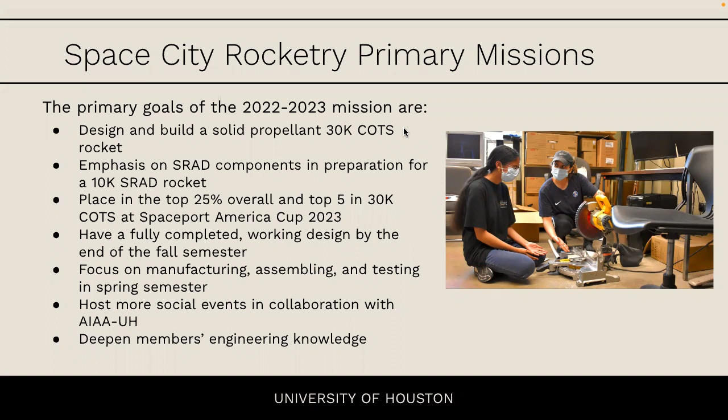Some of our secondary missions include beginning research and development into SRAD solid rocket motors, encouraging members once again to obtain their L1 flight certifications, continuing the research and development of composite tubing using the X-Winder with our structures subteam, and mainly with our analysis subteam, continuing the practical use and learning of various engineering simulation software such as CAD, FEA, CFD, and also getting our feet wet with some custom flight simulations.

Joe will now cover our team structure for the upcoming year. Thank you. So, as you can see in front of you...

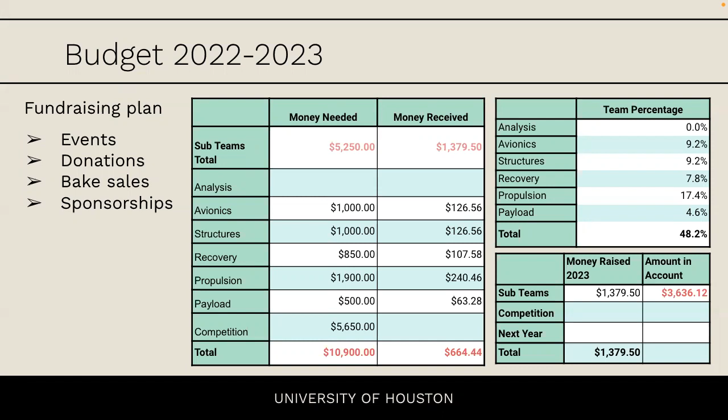Okay, up next we have the sub-team projects. We will start off with the analysis sub-team lead, Omar.

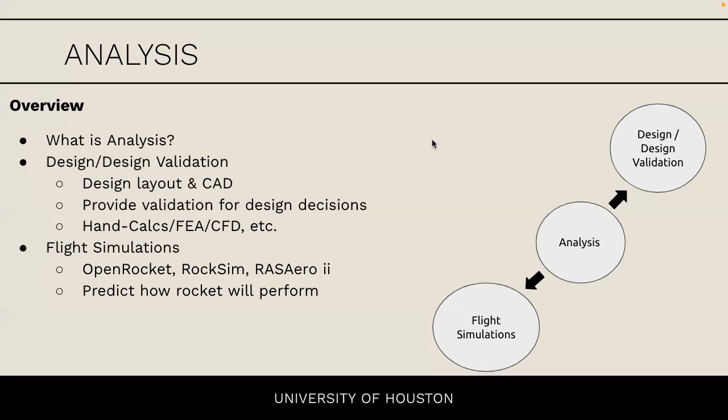A little overview of the scoring of Spaceport America and why we place such an emphasis on this. Out of the 1,000 points total possible, 500 come from flight performance. Out of these 500, 350 come from how close we get to our target apogee, which in our case is 30,000 feet, with a plus-minus of 30%. So if we stay within the 21,000 to 39,000 range we get points, but obviously the closer we get to 30,000, the more we get.

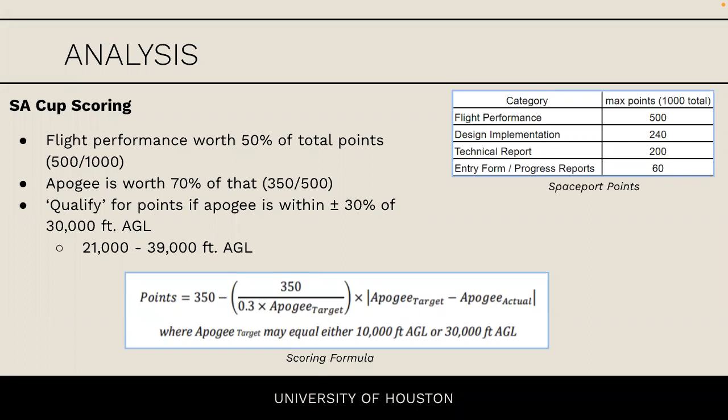Going into the design itself, our layout looks pretty similar to last year. The biggest difference is that we're 4 inches instead of 6 inches. The material for the airframe, nose cone, and bays stays G12 fiberglass, and those are the respective dimensions for each component. Another noticeable difference is our avionics and payload bays are a little bit longer, since they'll need more space given the smaller diameter.

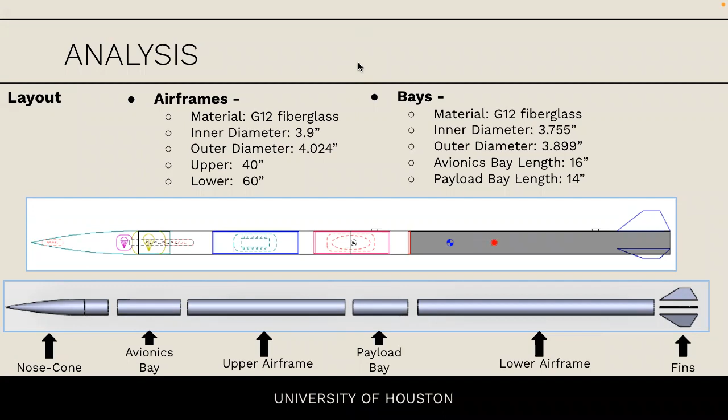That's kind of what our layout looks like. We have a lower and upper airframe, and a nose cone. Our payload bay serves as the coupler between the lower and upper airframe, and our avionics bay lies in our upper airframe.

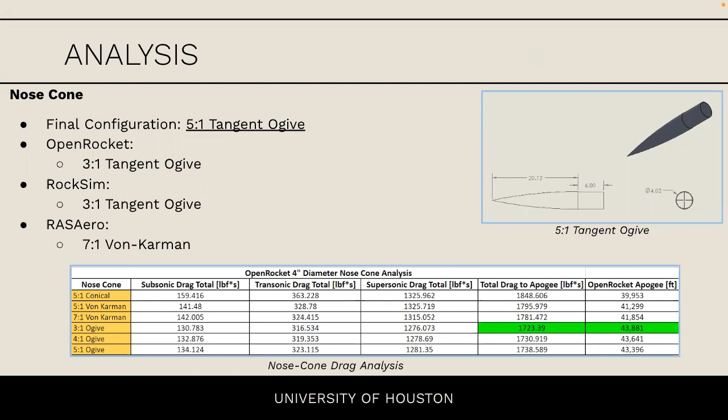For our nose cone, our final decision is to do a 5-to-1 tangent ogive shape, which you can see in the top right. The way we determined this was we ran different configurations on potential shapes we wanted to look at, and looked at how much drag gets induced on the rocket based on each shape. OpenRocket and RockSim showed that 3-to-1 tangent ogive was best in terms of drag, however RASAero said 7-to-1 von Karman, but the difference wasn't large at all. We did go a little longer—the reason we went 5-to-1 was to give recovery a little more space, so we went with 20 inches in length.

Next, I'll talk about the fins. The fin shape we're going with so far is in the top right, a trapezoidal shape, slightly swept back. The way we chose this was we wanted to maintain the 1.5 to 2 calibers of stability that Spaceport wants us to maintain, and we wanted to make sure our fins don't flutter and divergence velocity isn't exceeded. Those are events during flight that could either cause our fin to deform or rip off completely. To study that, we use a software called AeroFinSim.

We looked at a few different fin configurations and output the velocity at which divergence events would occur, making sure not to exceed that during flight. We have a factor of safety of 1.31 before divergence occurs, which is the first major event.

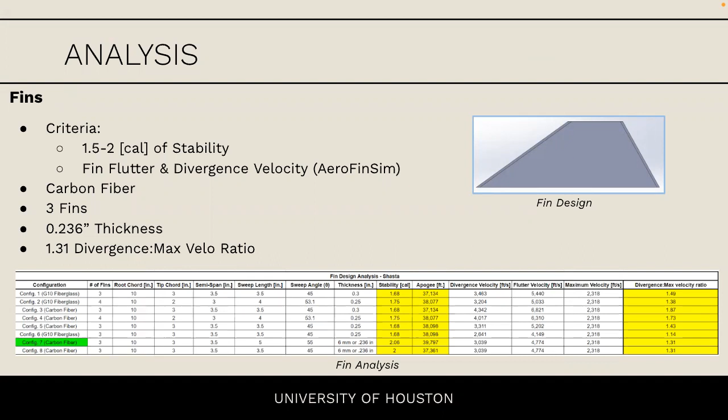One major difference is we're doing 3 fins this year instead of the typical 4, because that gives us the most leniency with stability if we want to change it down the line. They'll be made out of carbon fiber, with a thickness of 6 millimeters or 0.236 inches.

Some future plans before the end of the year: find when max Q occurs, which is max dynamic pressure or mechanical stress on the rocket. We also want to make progress on the custom flight sim software down the line, and continue any relevant analysis throughout the year.

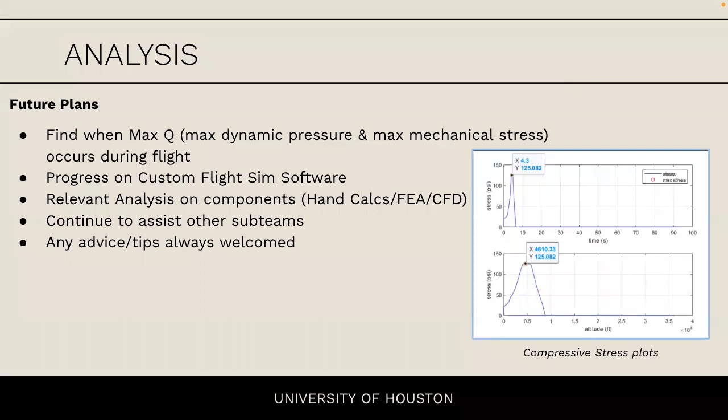And of course we'll continue to assist any other sub teams along the way. Any advice, tips, anything you guys can think of that we might have missed or overlooked, feel free to let us know. We'll definitely look into it.

We have completely revamped the way we've been looking at risk for the past few years. If you've attended previous Space City Rocketry presentations, you'd be familiar with the risk matrix, a colorful grid where we'd place risks depending on their likelihood and consequences. This year, ESRA has released a risk assessment table template they'd like teams to use.

This table includes the failure mode or event, the general risk that's possible, some possible causes of said risk, the risk of the mishap and the rationale behind defining that risk. The mitigation type is either risk mitigated through design, risk mitigated through procedure, or risk that cannot be mitigated and is out of our control. We'll then detail the mitigation approaches we've taken or will take, and the consequential risk after mitigation.

Omar will talk about some of the stuff the analysis subteam has been looking at so far, and every subteam will have their own edition of a risk assessment table to provide a comprehensive look at risk for Shasta the Sixth as a whole.

To go over our risk assessment: we came up with 5 events that we thought could occur during flight that were relevant to analysis and could lead to failure. The first one is fin failure. Possible causes could be the fin isn't thick enough, the material isn't strong enough, or the shape makes it more prone to happening.

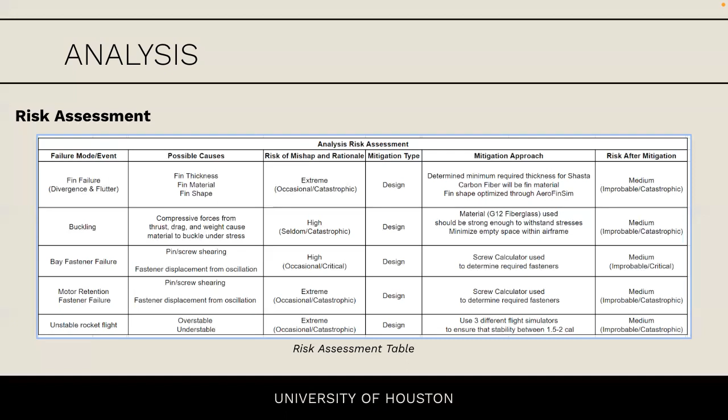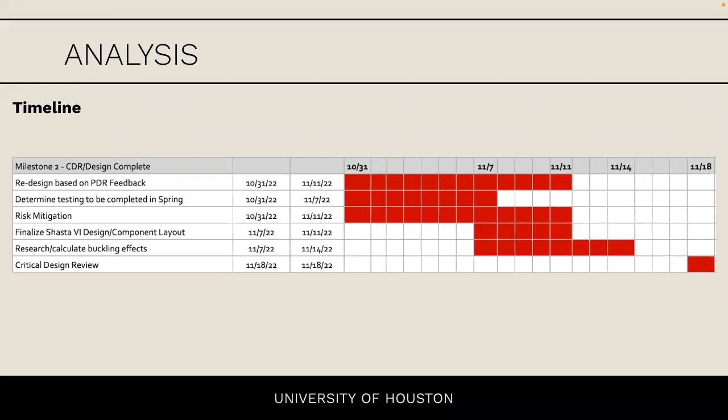This is just a timeline of what we have left: redesigning, determining any testing, risk mitigation, doing our final layout, researching any buckling effects, and then our CDR. Thank you.

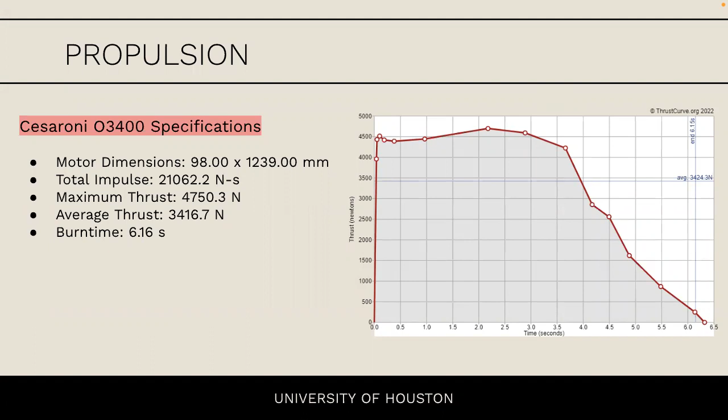For this year, we'll be reusing last year's motor, the Cesaroni O3400. Some quick facts about this motor: it has a total impulse of 21,000 Newton seconds, a maximum thrust of 4,750 Newtons, an average thrust of 3,416 Newtons, and a burn time of 6.16 seconds.

So we were using it, but why? We'll be reusing it, one, because this reduces the team's expenses. It's pretty expensive to just go buy another motor, and already the reload costs around $1,600. The team also has prior experience with this motor, which reduces risk of misassembly at spaceport. And this motor does provide sufficient impulse to reach our goal of 30,000 feet.

If we compare it to a motor from last year, which was its main competitor, the N5800, the O3400 has a similar total impulse and double the burn time. This reduces the acceleration of the rocket and reduces the forces on the body frame.

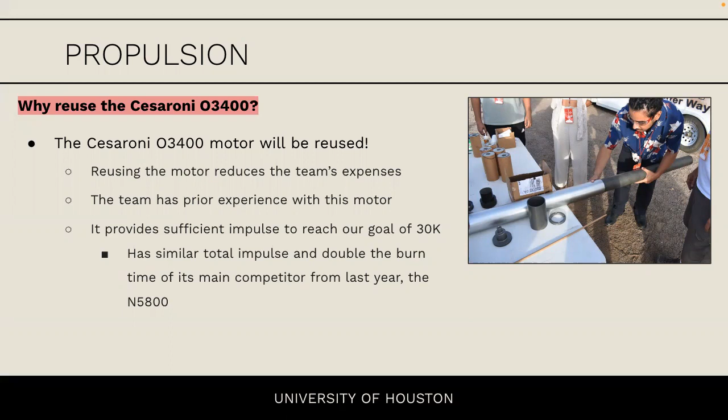Our current status is we have inspected the O3400 and cleaned it up. It does have some scratches and minor scuffing on threads, and there's some residue left over near the nozzle, but we do think it is ready to be reused for the next competition. All we need to really do is just buy another reload kit.

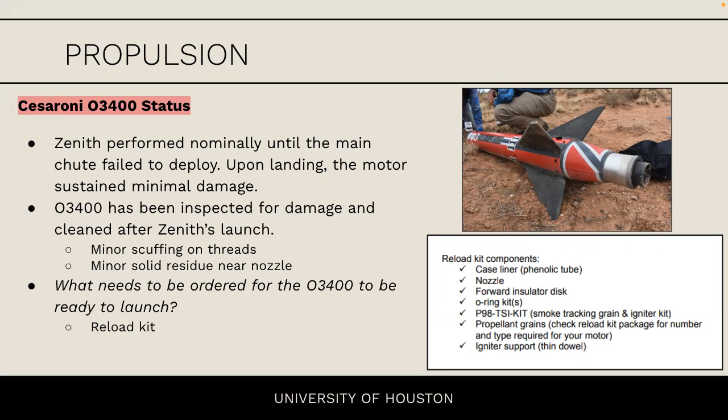All right, hello, my name is Scott. I'm going to go over the risk assessment.

Some of the risks we're looking at, starting with ignition failure: that could happen because we input the igniter in wrong, perhaps, or prepared it improperly. It's pretty low risk because it's not really dangerous to the personnel or the flight. It might happen, but through procedure, which would be our mitigation, we'll just follow the right procedures and obey the launch control officer's instructions. Overall, it's a pretty low risk thing.

One major thing that could go wrong is the motor explodes. This could happen because propellant clogs the nozzle due to fuel grains coming loose, or if the motor casing was damaged from the last flight. This is improbable, but pretty catastrophic, so we put it at medium risk. It's pretty rare, but it can cause some damage and possibly hurt someone. So through procedure, we will make a thorough inspection of the parts, make sure the grains are all good when we're putting it together, and maintain a safe distance from the rocket. Overall, it's accepted low risk—everyone launches rockets, but they can explode.

Premature ignition is another hazard, and that could happen due to improper wiring of the igniter or accidentally contacting a live circuit, maybe in the avionics bay or something like that. It's pretty improbable, but it would be catastrophic because there's a risk of someone getting injured. So through procedure, we will handle equipment responsibly and obey the launch control officer's instructions, and that is also low risk.

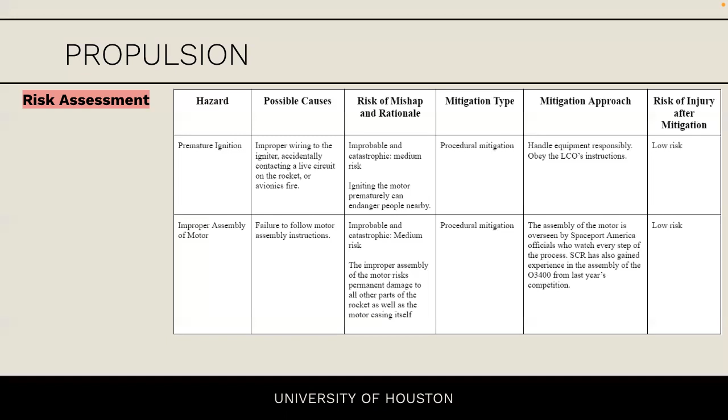Our budget is around $1,900 for the reload, as well as the hazmat shipping fee, because it has to be transported safely.

For our timeline, before the CDR we're going to finalize the risk mitigation and finalize our budget. Since the motor has been decided already for the 2022-2023 competition, propulsion is going to be focusing more on SRAD motors. Our first goal right now is to get our members L1 certified, as many as we can, by at least 50%, so that we can start testing motors of higher impulses legally.

We also have our SRAD test stand we'll continue working on, and we're working with a capstone team on that. And that's it, thank you.

Getting into an overview of structures, we are responsible for designing, purchasing, or producing based on the component, and the assembly of these structural and aerodynamic components in our projects. We work very closely with analysis to get validation for these components and make sure that everything meets the strengths that we require for our rockets.

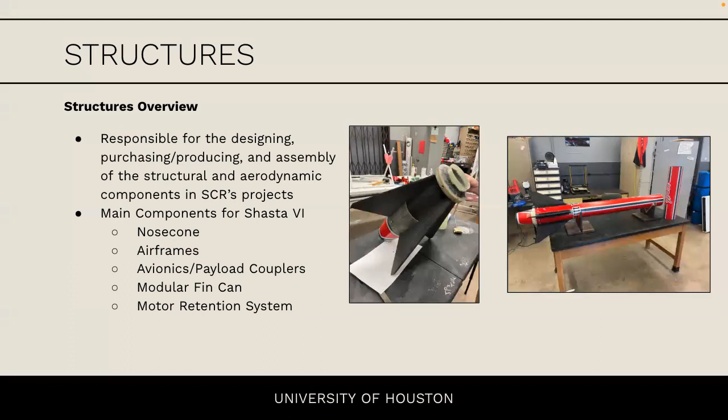Some of the main components we've been working on for Shasta have been the nose cone and airframes, of course being the 4-inch minimum diameter, the avionics and payload couplers, as well as the modular fin can, which have slightly new designs we are working towards. And of course the motor retention system, which we are basing largely on Zenith's past design.

The main reason for this design going into payload configuration was an increase in the inner volume and utilizable space that they can use for their experiments. With the previous all-thread rod design, the entire center of that bay would not really be usable, just because it would be filled with fasteners and nuts and stuff.

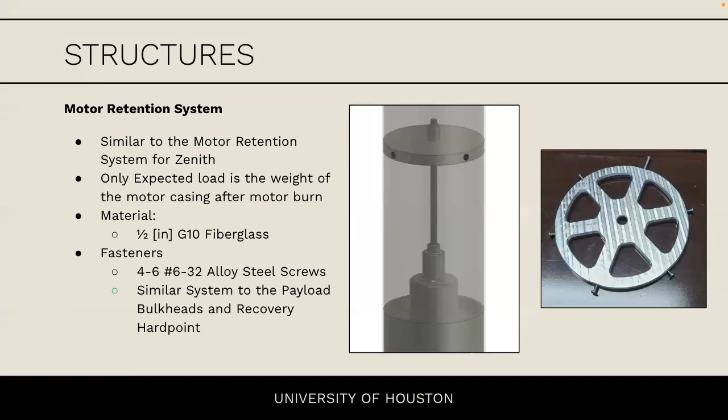Moving on to the modular fin can, this has been a tough design process just because of the movement into the minimum diameter design. We can't really utilize any fin tab methods for securing the fins in place. So we realize that it's going to be pretty tough and complex to manufacture this in a safe way that we hope will survive a flight. So, in order to keep this main assembly modular, or as modular as we can keep it...

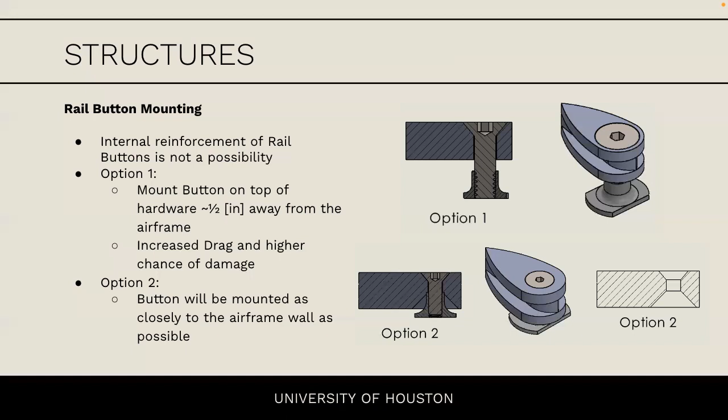In the future, we are planning to test a lot of these components as they're fairly new for us in terms of minimum diameter components. We are reaching out to professors and alumni for advice, because at the moment I am not the most knowledgeable on testing processes for materials and calculating maximum strength. So we are relying a lot on outside input to help with validation for that.

Some of the components we are planning to test are the fin can, more specifically the fillets and layup process that go into the fins. The main thing I'd like to touch on is the addition of carbon fiber or fiberglass chop fibers that we would place into those fillets. Doing our research last year, we concluded that the addition of these fibers would increase the strength and overall stiffness of the structure. But I would like to get some numerical values and more validation behind that so we can make sure we're moving in the best direction possible, just because going to Spaceport last year, we witnessed a lot of fin cans and fins breaking off mid-flight.

It was not the most reassuring sight, so I'm hoping we can avoid that.

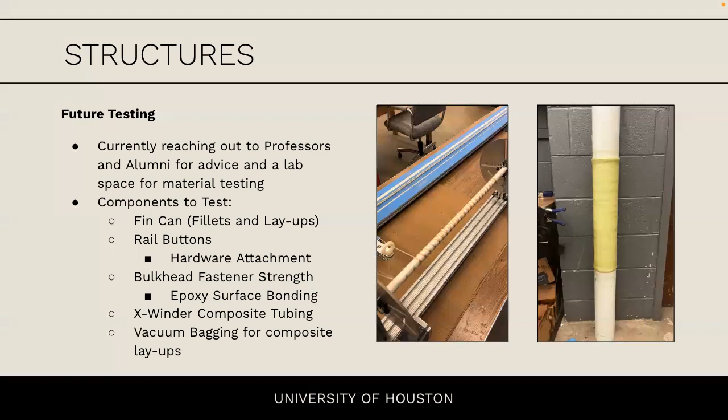Last would be vacuum bagging for composite layups. Randy has talked to us a little bit about the benefits of using vacuum bagging for the layup process, avoiding the regular hand layup process to make our components. So it's something I want to look into, but it is slightly expensive and complex for the current components we are looking at. Hopefully we can create a basis for that and start looking into implementing it into future rockets.

For the risk assessment for structures, we mainly tried to focus on things that would strictly affect structures and not necessarily go into the area of analysis. That said, there is some overlap, so bear with me on some of these.

The first is damage of aerodynamic surfaces, or just the general structures on the outside of the rocket. This is a risk of medium due to improper handling and accidental damage of the airframe, which could decrease our total apogee based on the amount of drag the rocket would feel on ascent. We would mitigate this through procedure and establishing handling procedures for transportation and assembly.

Next would be motor block failure. More specifically, this would be caused by fasteners or incorrect assembly. Due to having a very similar design for this year's system compared to Zenith's design, we hope to have some comfortability with that and mitigate it through pre-flight checklists and experience gained from that system.

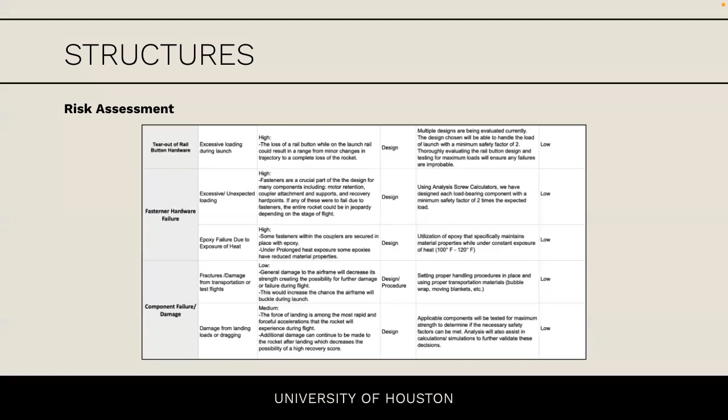The budget for structures this year is $1,000. This is a general overview of the things we expect to purchase: the airframes, the 5-foot and 4-foot sections, the couplers for each of the payload and avionics subteams, the carbon fiber plate for our fins, fiberglass plate for the couplers and bulkheads, screws, the nose cone, and some materials for the resin molding techniques for the rail buttons. Depending on which options we go with, that may or may not be included in our final budget.

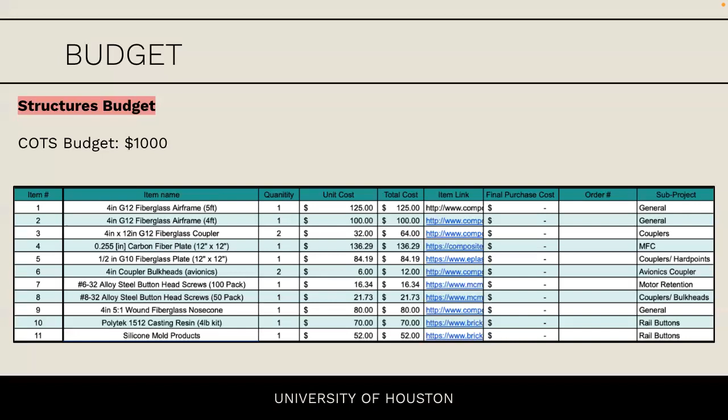The timeline for structures mainly depends on how quickly we can go through the testing procedures and final design processes for each of our components. Some of these things would include finalization of the avionics and payload bay designs, including the bulkhead design for recovery and avionics, the motor attachment methods, fin attachment, fastener size and location, and the rail button decision based on our current options, risk mitigation, and the testing we'd like to complete in the spring. Lastly would be the build materials we spoke on in the last slide, going on the processes we expect for the rail buttons and overall methods for composites. We'll change it up as we go.

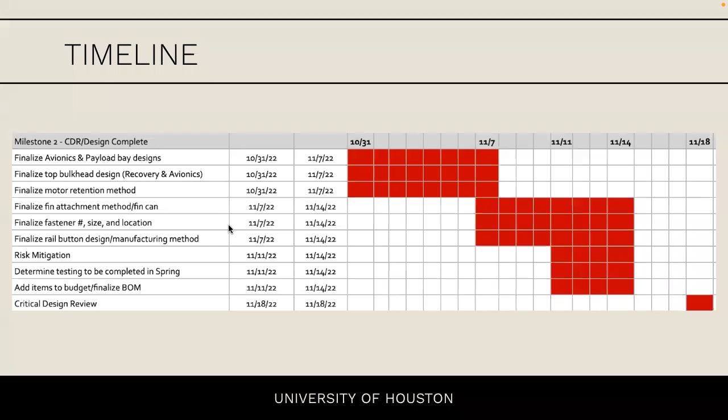Next, we'll have Kevin and Izzy talk about our payload experiment this year.

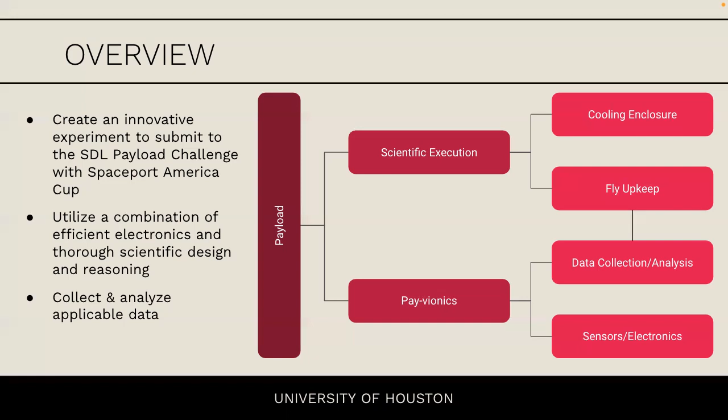So to provide a base for our experiment, we did some extensive research to give a background to all of our knowledge moving forward with our experiment.

We have a very lengthy paper that we're working on throughout the year and we'll be updating and adding to. It's called our statement of work. So this can be found in there.

One thing I would like to define is the state that the flies will be in throughout the experiment. We are hoping to achieve a homeostatic torpor state, a state of hibernation achieved by lowering the temperature. They go into hypometabolism and hypoactivity, so they pretty much just go into a lengthy sleep. Therapeutic hypothermia is not necessarily freezing them, but lowering their temperature.

In cases of hibernating animals and also treatment on humans, therapeutic hypothermia's main purpose is preserving organ viability. It's also known as one of the strongest neuroprotectants, but it's never been conducted or tried out on an organism in a high stress environment.

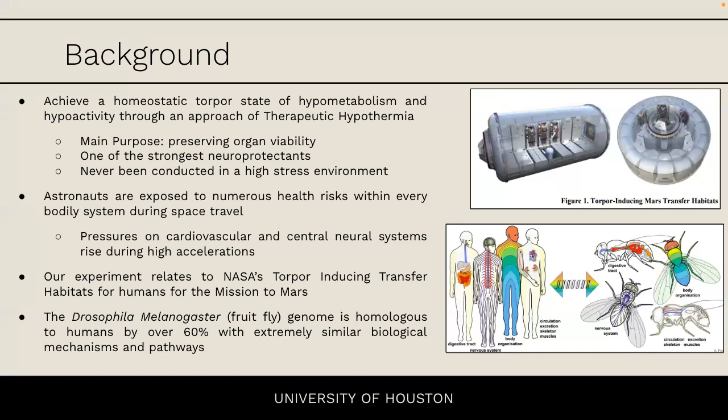The purpose and hypothesis of our experiment is we will be examining the behavior, oxygen intake, reaction time, and health of the insects before launch. So we will do a lot of control experiments on our flies and data acquisition during launch, which our sensors will read. Then after launch, we will do another examination on all of their mechanisms and behavior.

We have a control group that will not be under therapeutic hypothermia, and an experiment group that will be sedated under low temperatures. We want to find out if being in a hibernated state will have a positive effect on the survivability and overall durability of the anatomy of the flies in a high stress environment.

If the insects are launched under synthetic torpor, they will have a better chance of survival due to therapeutic hypothermia's protection of the cardiovascular system, the central nervous system, and overall anatomy, like muscles, wings, etc. That is our hypothesis. In order to find an adequate model organism for our experiment, we went through a trade study and we had upkeep.

So it's pretty much how hard is it to take care of them? What experience do we have taking care of these insects? The accessibility - where can we buy them? How easy are they to get? How easy are they to re-up on?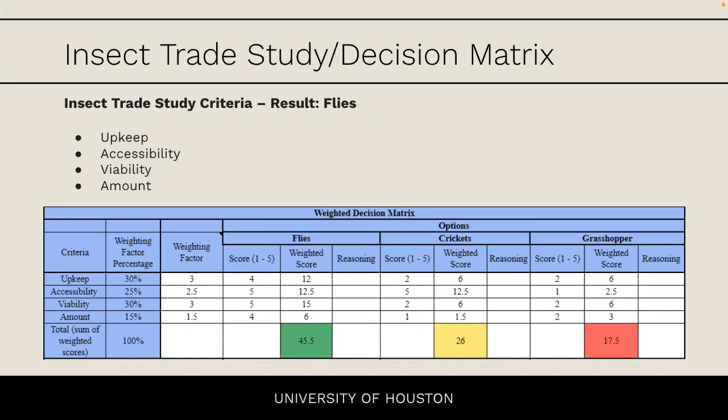Our viability is at what points do they die, how long is their lifespan, how often do they mate, as well as what do they freeze under, what do they die under. Also, if these bugs were to get out, a big thing we didn't want is an invasive species of New Mexico. And then also the amount - how much we can examine and fit in the rocket, especially with a smaller diameter, and flies won by a lot.

So we do plan extensive documentation of our experiment just to ensure everyone that we were doing it humanely, especially dealing with living things. So we do have fly upkeep documentation plans. We have a detailed upkeep procedure in our statement of work.

All procedures and tasks are conducted in the fly lab on campus at UH, and they will be provided by the genetics professor. It'll also be logged in our upkeep journal, which can also be seen in our drive.

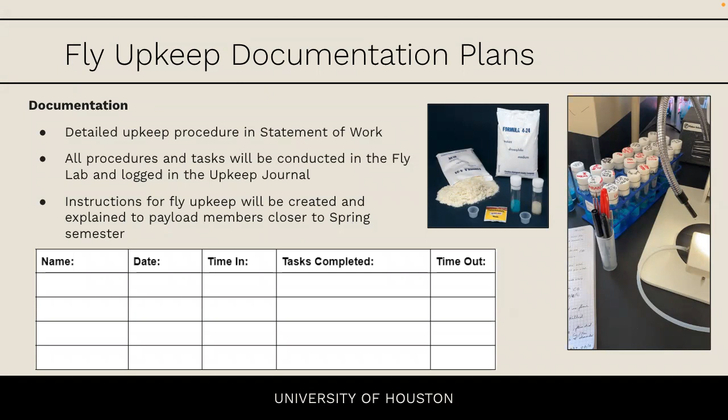The instructions for fly upkeep will be created and further explained as we move closer to spring semester, just because we're focusing on onboarding new members for the concept of the experiment, and all of that will be charted out later on. So it's just a quick log to make sure we're all on the same page, we communicate with each other, and we hope to check on them at least once a day to make sure the viability of them, there's no infections, we can treat any infections, and have extensive documentation and make sure our inventory is good.

So Kevin will speak about the other elements of payload.

So for our housing design, our internal structure will have 3 different sections to it. The top section we plan on having a smaller enclosure that will have the control side of the experiment. We call it the Fly Control Containment Unit, the FCCU. Sadly, I don't have a CAD for it yet, so I'm sorry about that.

The middle section of our payload will be for the electronics in the tray. And then the bottom section will be for our experiment, where the flies will be under the therapeutic hypothermia. The CADs on the right are our preliminary designs for the housing.

So we'll have the flies within those vials, and then it'll go into the container, and our cooling method will be within the container. For the lid of the vials, we plan on putting sensors on top along with cotton plugs so that they're able to breathe, and then everything will be secured properly once we assemble it.

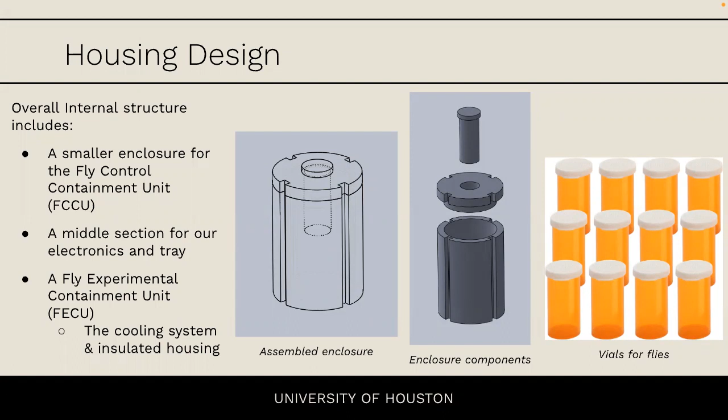For our cooling system, we've looked into using an insulating case with a cold substance. One of the materials we plan on using is aerogel. Thank you, Alex, for donating aerogel to us. So we plan on using a cold substance to keep the insects within the temperature range we want.

One of the other designs we've looked at is the cooling liquid pump. This is the more active part of the cooling system. We're still not too sure about using a cooling liquid pump due to the complexities it would bring into our project, as well as the size limitation we have, and the requirement for having a pump and all the tubing and stuff required for the liquid.

So we plan on doing a cooling substance trade study. Some of the materials we've looked at are cooling gels, phase change materials, and ammonium nitrate and water, which is what we used last semester for our E. coli payload. And then we also have ice on our trade study.

We're also working on a heat transfer calculator so that we can input material properties like thermal conductivity, and we can adjust the different layers, and then we'll see how the internal temperatures will be affected with our external temperature input. We've also talked to Dr. Gasemi for advice. So that's what we're working on.

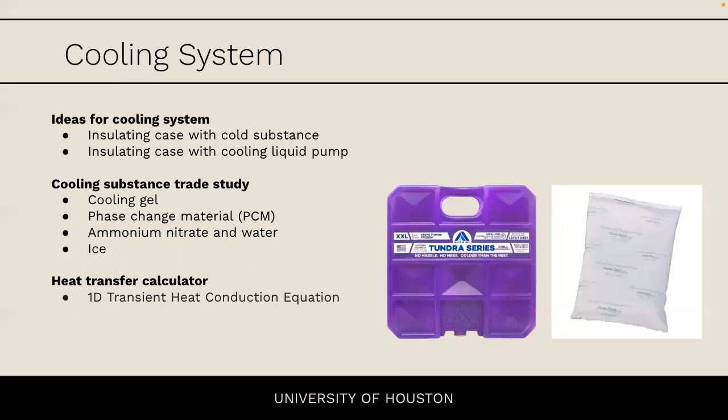He gave us the 1D transient heat conduction equation, which we're working on for our calculator. He's also recommending us to use the phase change materials, which he thinks will work to reach our temperature range.

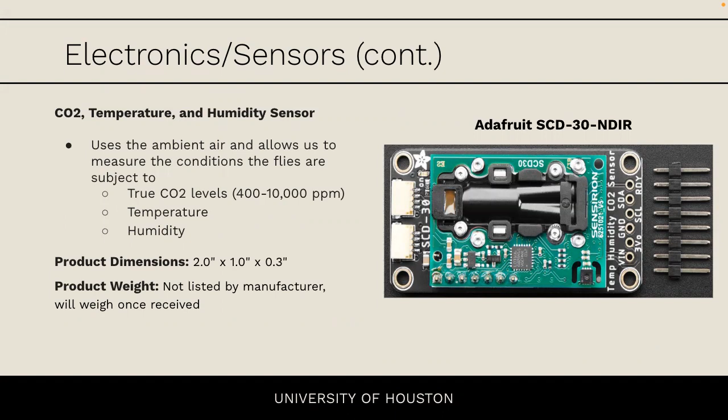And then our second sensor will be for the temperature, CO2, and humidity. This will just be within the payload bay. It'll be the Adafruit SCD 30 NDIR.

As for future testing, we'll be doing thermal oven / heat chamber testing for our cooling system to make sure everything works properly next semester. We'll also be doing the therapeutic hypothermia tests and the control testing on the flies so that we have the before-launch data to compare with our during and after data.

We'll also be doing infrared testing with the flies to see what type of data we can get from it, and we'll be doing more research into that as part of our design process. Then we'll be doing the vibrational effects testing for our motion sensors. We plan on doing that by launching the sensors within either our L1 or L2 rockets. We also plan on developing additional tests as we progress through our design.

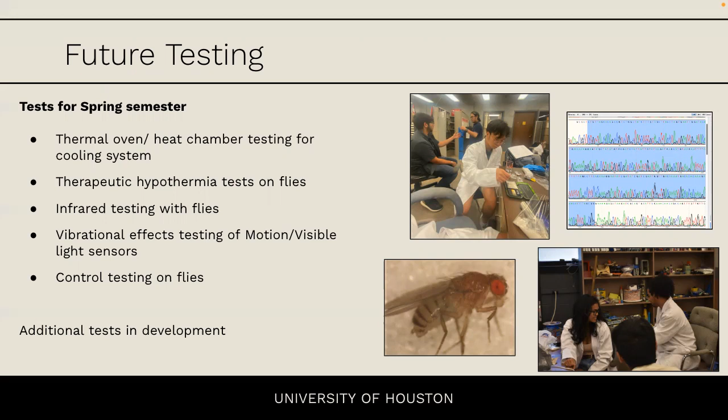So for our risk assessment, our first one will be the failing of the cooling system. We think it's likely to happen due to how hot it can get in New Mexico, and how likely we are to completely seal the enclosure to keep all the cold air and stuff within it. The mitigation type will be design, and our mitigation approaches, we'll be using proper materials and sealants to prevent any leakage of the cooling substances from the cooling enclosure.

If it does fail, and depending how much it fails, how much leakage happens, or how much it can keep it cool, it could be catastrophic because it could prevent any of our experiment from happening.

For our second hazard, we have vials housing the insects breaking. We think it's unlikely or seldom to break unless a lot of compressive force is put onto the vials, since the vials will be inside the enclosure. The mitigation type will be design, and our mitigation approach will be choosing a vial with more durable materials. We've been looking at plastic containers that they use for medicine, like the little pill bottles. That's the type of materials we've looked at. We also have designing the enclosure to better secure the vial so it doesn't fall out and move around within our payload too much.

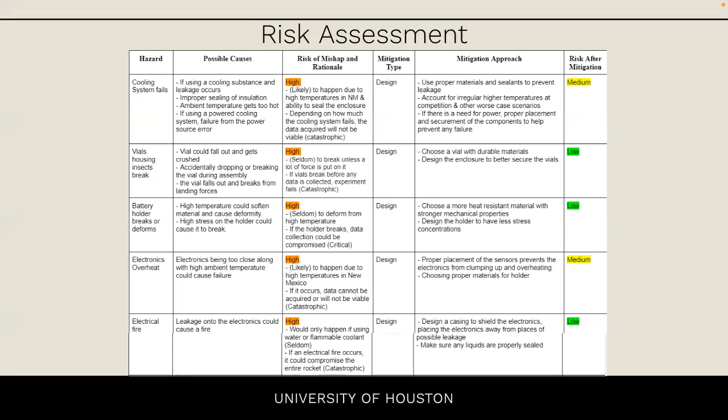As for our electrical fire hazard, we think it would seldom happen, since it would only happen if we use a liquid for our cooling system, and only if any leakage happens within our enclosure. The mitigation type would be design. We plan on mitigating this through designing our electronics section to have shielding from any possible leakage from the enclosure.

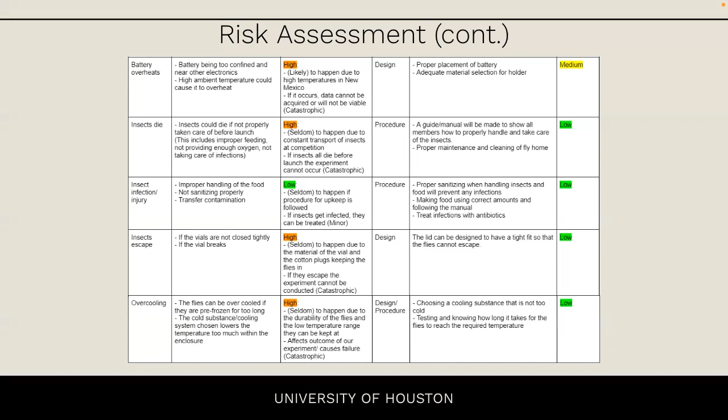We believe overcooling could happen just depending on what cooling method we go with. It would be catastrophic just because if we freeze them too much, they could die. But we would choose a cooling substance that's not too cold. A reason we looked into an active cooling system is just so in a perfect world, we would have an active cooling system that would turn on and off and regulate the temperature inside. But we ranked this low after our mitigations through design and procedure.

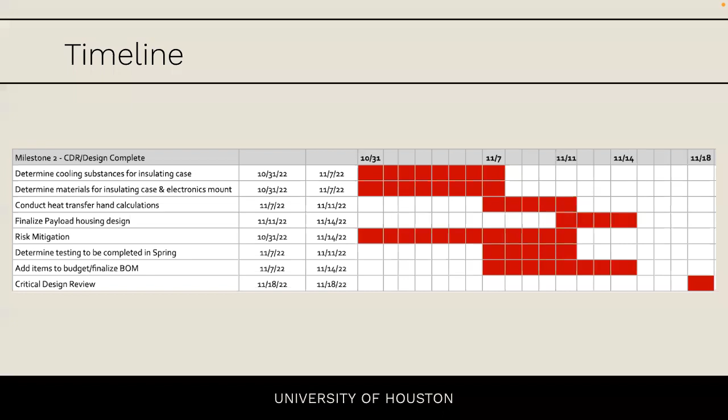So for our timeline, we'll mainly be focusing on finalizing our design and finishing the risk mitigation. Our next steps will be determining the cooling substances we'll be using, as well as the materials we'll be using for all the casings and installation. We plan on finishing our heat transfer calculations so we know if our design will work or not, and then we'll also be finalizing our payload housing design. That's it.

Up next, we will have Christian and Bailey present about recovery.

Hey guys, my name's Christian and this is Bailey, and we are the recovery sub-team leads for this year. So we're going to start off with a brief recovery overview. Our goal in recovery for this year is to recover Shasta 6 in flight capable condition. We're going to do single bag dual deployment.

For our drogue parachute, we're going with a high performance coefficient of drag 2.2, 36-inch chute. We're going to get a descent rate of 120 feet per second and a snatch force of 74 based upon our calculators that we developed last year. Our primary CO2 and black powder systems will be our ejection systems.

For main deployment, we're going to go with the Iris Ultra 72-inch, the exact same chute that was used on Zenith last year. Descent rate 25 feet per second, same as last year, and a snatch force of 193 pounds. In order to allow for single body dual deployment, we're going to use 2 L2 tender descenders in series for redundancy.

So our ejection systems: our primary this year is going to be the CO2 system. It's going to be the Raptor, uses 23-gram cartridges. The Raptor operates by using a small amount of black powder stored inside to move a charge piston. This charge piston punctures a CO2 canister, which then ejects CO2 into the recovery bay. This generates enough force to break 3 shear pins. 120 pounds is required to break these shear pins, so we set a value of 180, which is with a factor of safety of 1.5.

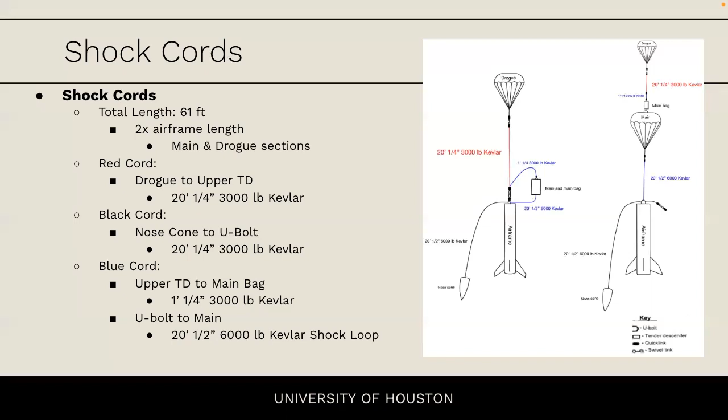For that, we're going to use 20 feet of 1/2 inch, 6,000-pound shock loop. The reason we're going to go with the shock loop is just to make sure that we don't have any issues with tying knots. The shock loops are much stronger than the Kevlar cords themselves and are stronger than any knot we could tie. So to minimize any issue with that, we're going to go with shock loops. And in order to retain the main bag, of course, we can't have that go flying off. We're going to use a 1 foot, 1/4 inch, 3,000-pound Kevlar shock cord length.

All right, so last year we had a recovery issue with Zenith. One rubber band that we used to attach the shock cords to the main bag ended up reefing the main chute inside of its deployment bag. This prevented main deployment, and instead we came down under drogue deployment at 120 feet per second or so. This is not ideal, obviously.

In order to mitigate this, we've developed a number of techniques. First is daisy chaining, which would replace the flaking we do, minimizing any issue with flaking in addition to the rubber bands. Ideally, this would allow us to remove the need for rubber bands around the main bag, eliminating the issues associated with them. This method absorbs shock much the same way flaking does. As the cord is pulled in tension, shock force is transferred to allow the daisy chain to be broken and pulled into one single line.

We've also come up with the idea of a shock lanyard, with the help of Randy. This would attach to all of the rubber bands on the main bag and would ensure that once the main bag is pulled in tension, the rubber bands either fall away or are broken entirely, again minimizing the risk associated with the rubber bands.

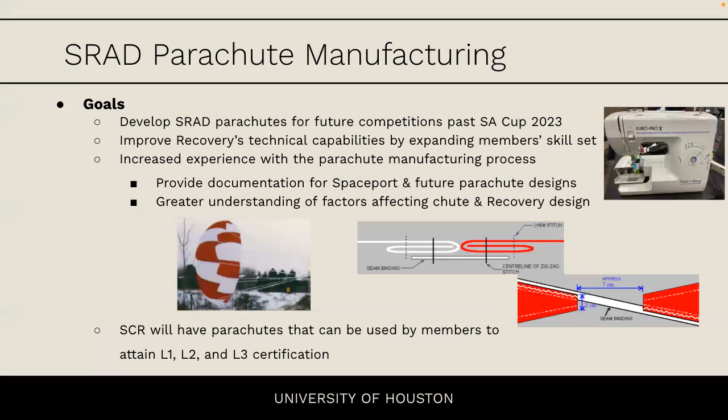Gore design: we are currently ahead of schedule and still very much in the preliminary phases. We are going to have this completed around early November, sometime before the CDR, but these are just the beginning stages. We are using a design program provided by Case Western, and we are going to go with an elliptical design for the drogue.

Right now we've invested more effort into ripstop nylon, but we will be moving into Dacron because we will be running trade studies between the two. We want a design similar to Zenith's drogue because that proved very successful during launch. With SRAD, we'll be lucky to achieve a coefficient of drag around 1. With COTS parachutes you can get a higher number, but that isn't typically the case with SRAD, at least based on what we've learned from teams at Spaceport and the University of Minnesota.

Right now we're looking at a 36-inch diameter for the drogue with a 4-inch spill hole. We're going to use nylon 550-pound paracord shroud lines to withstand shock force, and size E thread. We've talked to the University of Minnesota sub-team lead for recovery, and that's the type of thread they use—it's been flight tested, so we'll continue with that. It should come out to about 1.1 ounces.

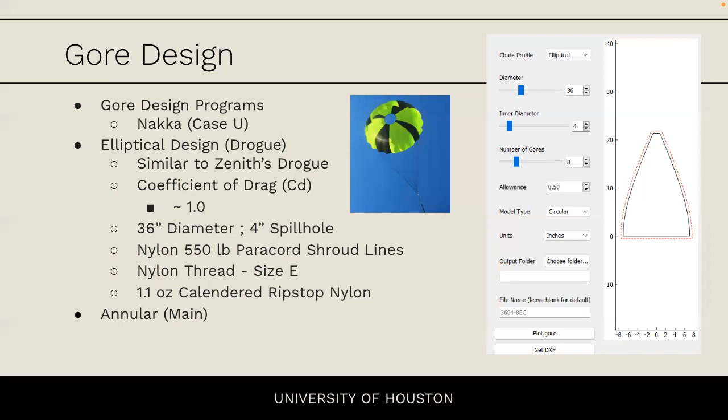The annular design for the main will be completed after we have testing for both of our drogues. As for stitching, we currently have a decision matrix going between flat felled and French felled seams.

We are leaning towards the French felled seams, but that will only be finalized once we conduct stress tests to determine how much the seams can handle. If it turns out the flat felled seam can handle more, that's the one we'll go with. But right now it's looking like the French felled seams will.

So the difference between the two: flat felled seams are usually used when materials are likely to experience stretching and stress. You have seam allowances encased within the seam, with no raw edges, and double rows of stitching to increase durability. French felled seams, which is why we like them, decrease the likelihood of fraying and are preferred for sheer, lightweight, and delicate fabrics—which is what we'd be using for a parachute. They've also been flight tested with UMN SRAD parachutes, so we know they can withstand flight, having had many successful launches.

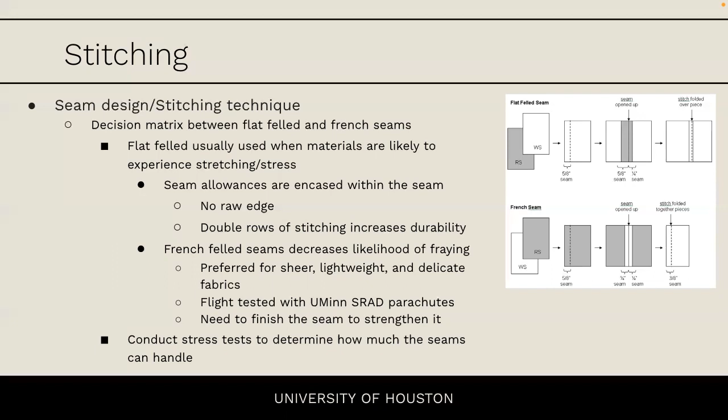You need to finish the seam to strengthen it, so that's one drawback—it requires a bit more work on our end. But once you do that, there are very few drawbacks to the stitch.

Another theme: for recovery, our general approach is going to be test, and more tests. We don't want to have any errors like we had last year. With SRAD, we know there are a lot of things that can and will potentially go wrong, so we're doing everything in our power to minimize that, starting with L1 and L3 flight implementation testing. As I mentioned, we're going to be working with Hobby Rocketry—that will give us more people, myself included, going for their L1, so we can get data to verify that the drogue parachutes do indeed work.

Raj has generously agreed to test both our drogue and our main for his L3 test, which speaks to the overall team's confidence in our ability to fully pull this off. It's great because that gives us more experience and a better understanding of how our parachutes are going to work in flight. Tensile strength testing, which I was also alluding to earlier, we're going to verify tensile strength for both our COTS shock cords and our SRAD parachute fabrics.

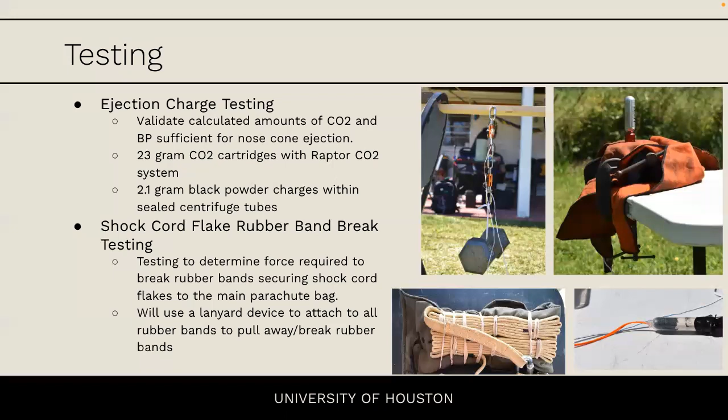We also plan to conduct shock cord rubber band break testing. This is mainly to determine the force required to break rubber bands if we indeed do decide to go with the flaking method again. We also plan to test the lanyard device to see how well it pulls away and breaks these rubber bands at the various forces that are required.

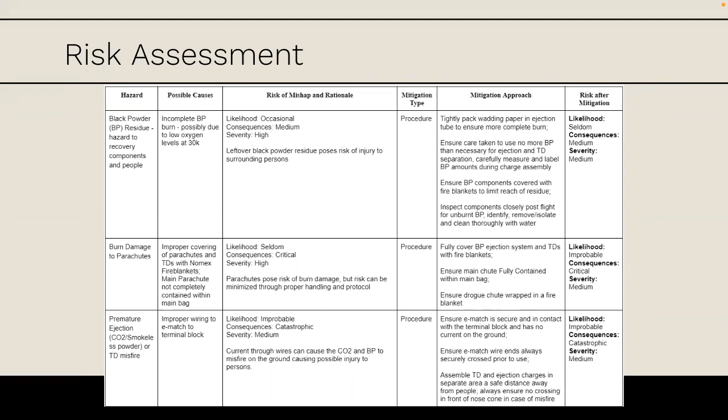So for a risk assessment, as with any recovery system, you have a lot of things that can potentially go wrong. A lot of these are able to be mitigated by procedure, but as you see, we do have a lot. For the sake of succinctness, if y'all have any questions, we are more than happy to go over it. A lot of our hazards are things like black powder residue, hazard to recovery components and people, burn damage to parachutes, premature ejection or TD misfire, complete ejection failure, CO2 system ejection failure, TD failure, main parachute failure. All these can be mitigated by procedure.

So as long as we don't cut corners, as long as we are solid in everything that we're doing before we go to spaceport, as long as we drill it, because we know that once you get to spaceport conditions are such that you're hot, you're tired, mistakes may happen. If we drill that, if we pay attention, if we're careful, we are going to be able to minimize those risks.

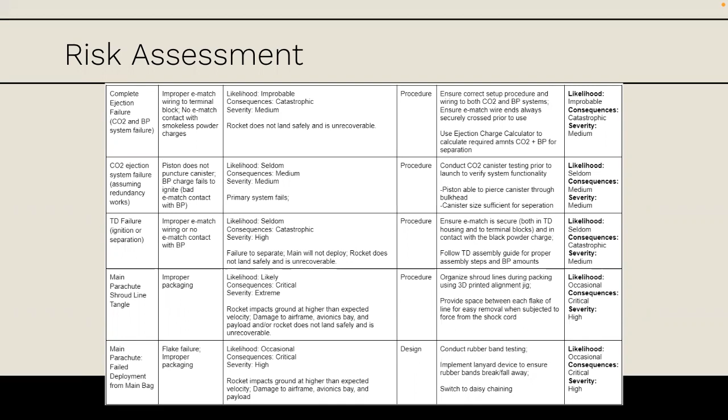Other things can be mitigated through design, such as main parachute failed deployment from the bag. That's what happened last year with the rubber bands. We are going to be conducting testing so that we eliminate that possibility to the best of our ability. Other issues that can be mitigated by design include shock cord failure, tender descender parts lost, and other factors pertaining to COTS, such as material failures, rips and tears, and component manufacturing defects are out of our control, but they still can be assessed.

Just going over briefly once we receive everything, making sure that everything is properly in order.

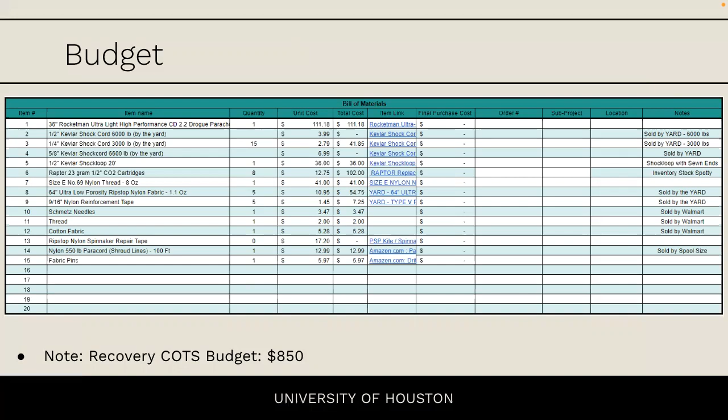Alright, so this year our recovery COTS budget is going to be $850. Majority of that so far is going to go to the new drogue parachute that we need, with a coefficient of drag of 2.2, 3-foot diameter, as well as the new lengths of shock cord and the CO2 cartridges, which are not cheap, as we have discovered. The rest is going to be SRAD type materials, so anything from needles to thread to the ripstop nylon material itself. It's all going to be part of the SRAD budget.

And timeline. So we have a number of tasks we must accomplish before reaching the CDR in November. We have to finalize shock cord lengths, determine the bulkhead placement and the U-bolt we're going to be using for the bulkhead, determine testing to be done in spring, and get a full schedule done for that. We have to revisit the risk mitigation with the data we get from today. We have to continue to add materials to the BOM, finalize gore designs for SRAD chutes, determine material choices, and finally, with any luck, begin drogue manufacturing for the CDR.

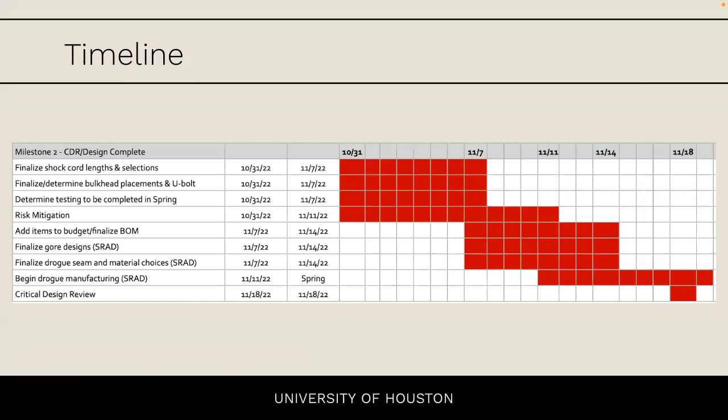And that is it for recovery. Thank you.

And last of our sub teams is avionics with Raj and Sam.

Hi everyone, my name is Samantha Tobias Leja. I am a biomedical engineering major and co-lead for avionics. My name's Raj Gohil, and I'm also the co-lead for avionics.

So for avionics, our main goals and tasks this year are the same as always, but with regard to SRAD additions. We will, as always, electronically detonate the recovery charges and collect telemetry data. We're making both a COTS and SRAD system with a portable ground station to view live data. We're going to provide critical information locating the recovery in the rocket this year.

So just a brief overview of how we divided avionics this year. We have two systems: the onboard flight computer system inside the rocket, and our ground system. For our onboard system, we're going to have our COTS flight computer plus the structures for it, and also the SRAD flight computer and sensors. Our ground system is mainly focused on the ground station plus software development, and we also have a mini team for telemetry, ham radio, and antenna development.

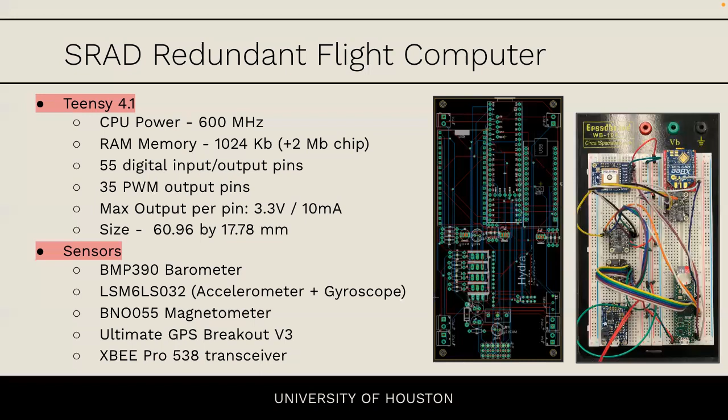You can see here on the right our initial concept PCB boards, starting to develop a flight computer PCB, especially for the Teensy. We're going to work really hard this year to include terminal block breakouts for the ejection charges. It's going to be a challenge, but we're prepared for it.

As for the structure and how we're going to place these flight computers, this year, instead of the tray layout like we've done in the past, we're going to do a combination of both a tray and horizontal stackable PCBs. They'll be mounted on 3D printed discs and standoffs with modular JST port connections. So instead of soldering the wires directly and making them fixed, we're instead going to solder JST ports and connect the wires that way, making it easier to connect and increasing the chance of it not breaking apart once the rocket lands.

We're also going to have a 3D printed tray on top of these horizontal PCBs to accommodate the COTS system, terminals, and screw switches, so the Telemetrum can stay fixed in a vertical position for flight mode. The advantages of this mixed system this year is that it maximizes space in a 4-inch rocket, it's really simple organization, as structures talked about earlier, and it has really easy wiring management.

On the right table, you can see on the bottom we're going to have LiPo batteries mounted onto the bulkhead through 3D printed brackets to holster them. On the first horizontal PCB, we're going to have the Teensy microcontroller and the SRAD ejection charge terminals. On the second PCB, we're going to have the sensors: pressure sensors, accelerometers, magnetometers, and the gyroscope. On the top, we're going to have our communications hub, so GPS and XBee radios will be on that top PCB, and on the tray we're going to have our COTS systems.

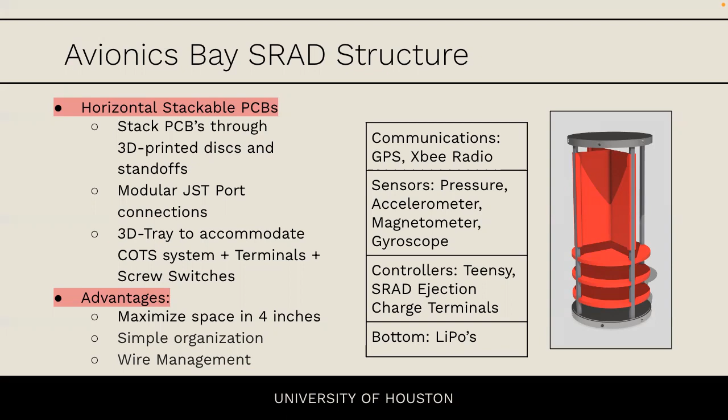So these are our 4 main sensors: the barometer, the magnetometer, the accelerometer, the gyroscope, and the GPS breakout. The barometer is used for pressure and temperature, and atmospheric pressure is commonly used for weather measurement sensors. The magnetometer is used for magnetic field intensity. The accelerometer is used for acceleration, and the gyroscope is used for angular velocity in the X, Y, and Z axis. Our GPS breakout is used for location as well.

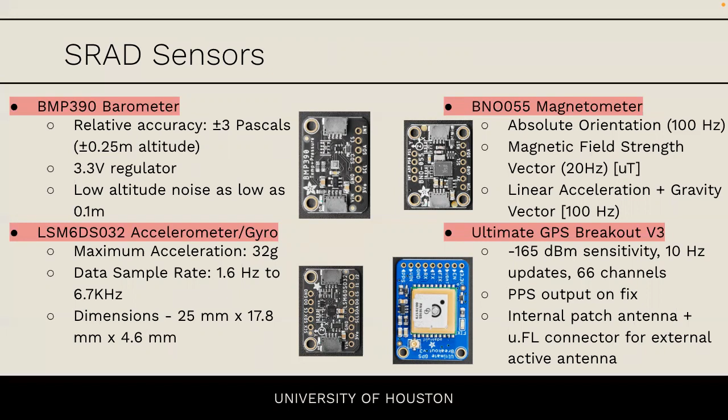All of these 4 sensors are going to be part of our PCB, which I'm going to go ahead and show. Oh, and this is our ground station. It's focused on data collection of the sensors and the display of data from the flight computers. It uses an OLED display and an altimeter to determine the data from apogee, acceleration, and velocity. We use the Arduino system to calculate some of our data, but this year we're probably thinking of using Python to calculate instead of Arduino.

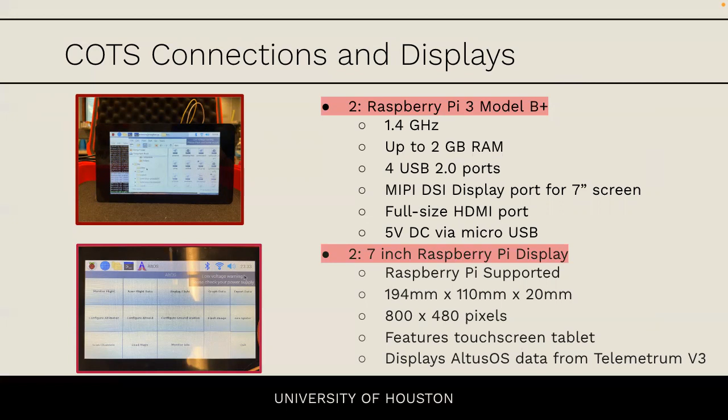So this year, for our SRAD data collection software to collect our SRAD flight computer data, we're going to use a Raspberry Pi OS if possible with a Linux distro. We're going to receive the SRAD sensor data from XBee Radio. Basically, how it works is that it will siphon the data to the Raspberry Pi, which will be connected to an XBee transceiver. It's going to display all the software and sensory data from the Teensy onto the display.

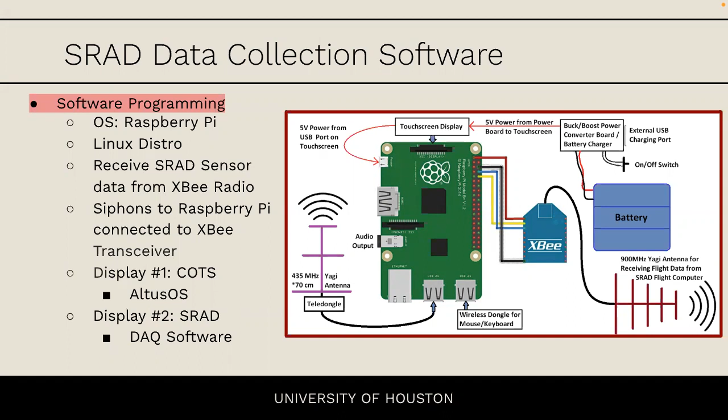For the data acquisition software, as Sam mentioned earlier, we're looking to mainly use Python for this software, and we're going to be coding it from scratch. We've been working really hard on doing that so far. We're going to talk later more in depth about how the software is being programmed, but as you can see here in this picture, this is a general idea of how the software will be integrated into our Raspberry Pi system.

So for our telemetry antenna setup this year, instead of one antenna like usual, we're going to use 3 antennas in conjunction with each other in order to have redundancy. The first antenna we have is the usual Yagi antenna, which will be tuned to the TeleMetrum V3. It will be operating on 435 megahertz on a 70 centimeter band.

And finally, our last antenna is going to be an APRS Yagi antenna. The way this works is that it will be on a radio program where we'll hook it up to a ham radio, and we're going to track the rocket through a foxhunt style - so whichever direction the Yagi is pointing, if it hears a beep in that direction, that's where we know the rocket's going to be. It's kind of like playing a game of hot and cold and tracking the rocket that way. This year we're having 3 methods, as last year we had a struggle when we lost telemetry and our GPS signal. That's why we're trying to have as much redundant system as possible.

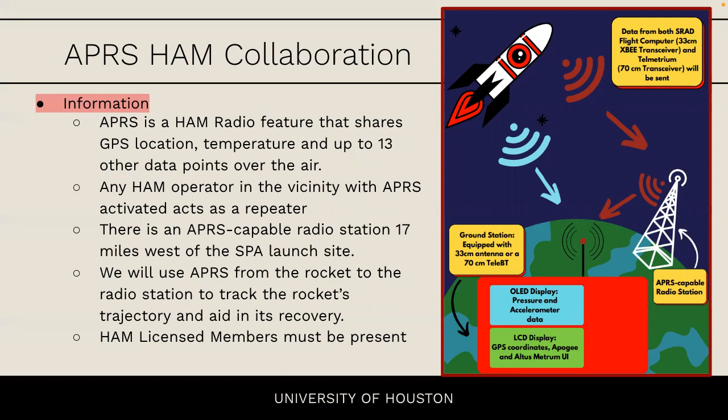Another addition this year, if time allows, is an SRAD weather station. Due to the unique desert environment in New Mexico, SCR has struggled with dealing with environmental factors in the past. Oftentimes we'll test here in Texas in normal weather, and then when we try our system at New Mexico, it just doesn't work simply because of heat or the environment and elements being against us.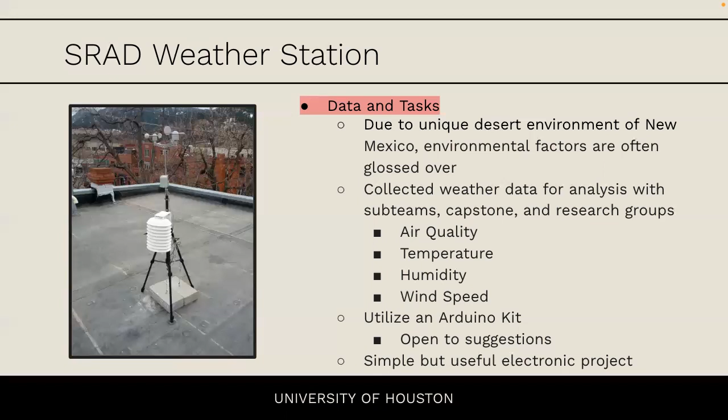So this year, if time allows, we're going to try to build a weather station that collects weather data for analysis with other subteams, capstones, and research groups. It can measure things like air quality, temperature, humidity, and wind speed. We're thinking of utilizing an Arduino kit, but we're open to suggestions on how we could use or build it. It'll be a pretty simple but useful electronics project for avionics members to get to know, so it'll be nice for us to have.

For future testing this year, to make sure our system performs nominally, we're going to have heat testing of the tray and temperature measuring instruments to make sure they work and that the tray is stable. We're also going to have pressure testing of both the barometric sensors and the flight computers to make sure they correctly read altitude and perform normally. We're also going to have ground testing for activation of charges and in-depth continuity testing of wires to make sure the system can properly ignite the charges.

We're also going to have integration testing of the whole rocket plus the avionics system to make sure we can assemble it as easily as possible, and telemetry range testing of the antennas to make sure the connections are nominal and that we can read data from far distances. Last but certainly not least, we're going to have flight testing of the SRAD flight computer on L2s. We're going to do pretty heavy testing on this flight computer since we know how tricky and scary building something like this can be, so we'll make sure it performs as normally as possible to avoid any issues at spaceport. This is our second flight computer, Flight Sim.

One of our avionics members has experience building second flight computers. As you can see on the dark screen, that's our source code, and the actual simulation is at the bottom. With this, he injects fake sensory data into an SRAD flight computer and sees how the microcontroller reacts. This is very helpful because we get to see acceleration and other components of the rocket. It creates a 3D simulation to calculate expected position measurements and allows testing of the flight computer on the ground.

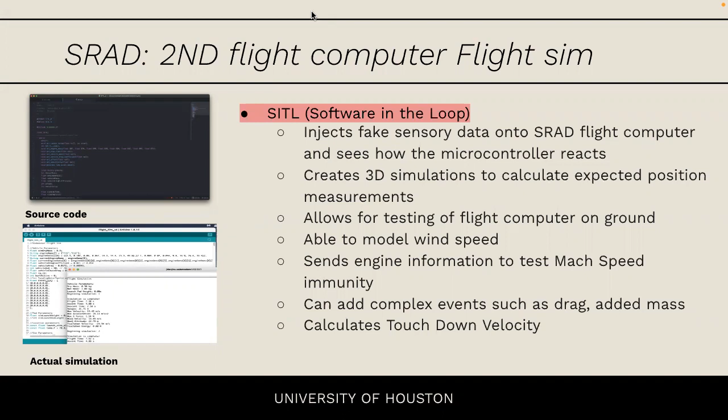That's enough, we got it, Brandon. The connection's breaking up, but we got through to Brandon. Hold on, let me type it. Here, I got it, yeah okay. I think, all right, no, mute him. Okay, no, I'll text him. Hold up. Oh, you messaged him, okay bet.

For our risk assessment this year, we selected our top 5 risks, which are: high power source LiPo injuries, improper soldering or modification of the SRAD electronics, sensors returning bad data and messing up the algorithms, improper handling of the ground station, and overall improper operation of the COTS or SRAD flight computers causing a misfire.

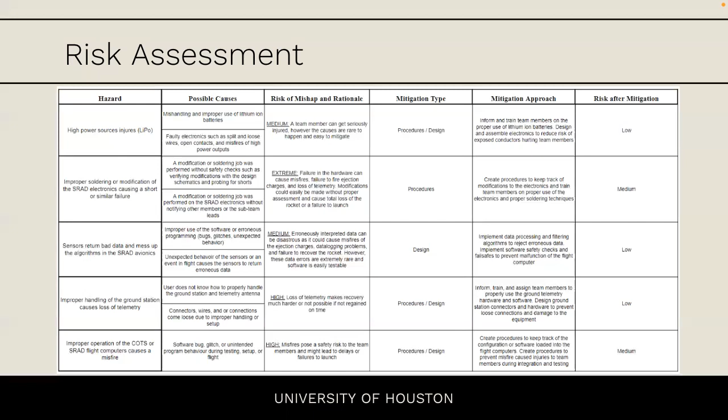The main way we'll mitigate these risks is through procedures and design. This year we'll focus on training members on the proper use of telemetry and LiPo batteries, designing electronics, and developing safety procedures to operate these electronics. After creating these mitigations, our risks are either low or medium, achieved mainly through proper training, proper procedures, and overall safety in handling these electronics.

For our avionics budget, we were allotted $1,000. Due to our LiPo batteries, PCB boards with shipping and handling, screw switches, and barometric sensors, some of our sensors won't be available until next year, so we're taking precautions and researching where to get them. Especially with certain technology, shipping costs a lot. Most of our budget is based on the sensors, and we're also getting new wire crimpers.

We'll continue working on SRAD components and ground station add-ons for the rest of the month, up to November 7th, and we aim to finalize the new antenna setup by mid-November. We're doing a lot of research on that, and some of our members are in ham radio, so they're working along with ham radio on this.

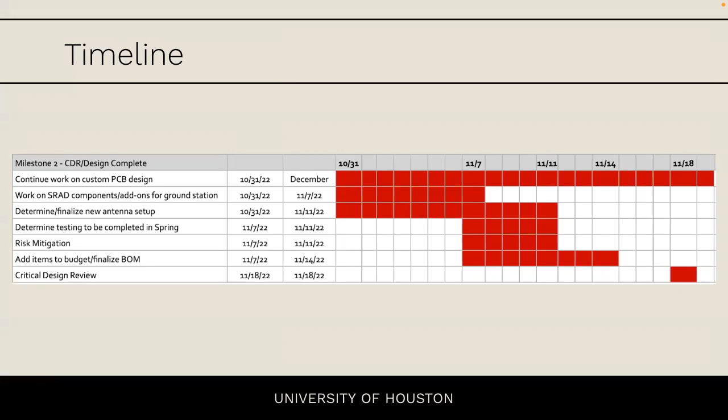Testing is determined to be completed by mid-November, and the critical design review will also be mid-November.

Yeah, that's a very—yeah. Sorry about those technical difficulties, thank you for bearing with us through that.

Some final points before we open up for questions: Shasta's timeline for the spring. This is a bit rough since we're mainly waiting to see how long components take to arrive, and we all know the variability with that.

We plan to spend most of our time manufacturing from January to February, all of March testing, and all of April practicing assembly—as Bailey brought up, getting through our procedures, nailing them down, making sure we know the ins and outs of our rocket, so we can assemble it even in extreme conditions at spaceport.

Throughout May, we'll have competition prep, submitting final documents such as the technical report. And in June, we will launch Shasta to 30,000 feet.

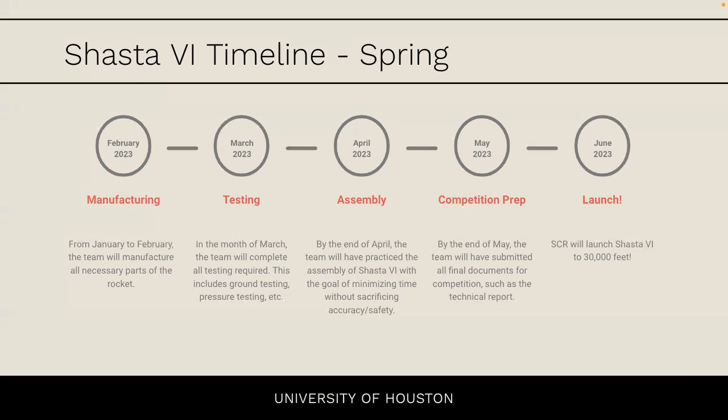So this concludes our presentation. We'll just be filling in some final points here and there. Just to reiterate, Shasta 6 is Space City Rocketry's second solid propellant 30K COTS rocket. The first one is the one you see right in front of you, to the right. That is Zenith. Most of the current leads took part in building Zenith and attended Spaceport. This is the reason why we believe this will be a successful year for us, because we will be able to learn from our past mistakes and ensure we do not make the same ones this year.

We will be hosting the CDR next month, Friday, November 18th, from 7 to 9 p.m. Our location has not yet been determined.

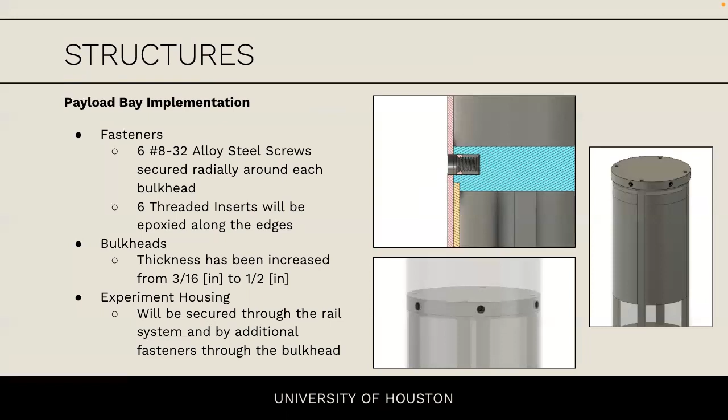Yeah, it's exactly the same thing. Okay, yeah, I see it. Question on that section: are those long things that the screws are going into, are those the rails? They are. And I realize the walls in this cross section look extremely thin. We would not be expecting a wall thickness of 8-32.

So yeah, they could be machined, or they could be bought commercially, in the sense that it would be a plate of fiberglass that we would then be able to cut and sand to the geometry that we need. That's one of the reasons why I like utilizing the fiberglass, because we have a lot of experience cutting and shaping it in the way that we need. So we'd be able to buy it commercially and just cut it to the size we're looking for. At that point, I feel like honestly it would be easier to buy a commercial off-the-shelf threaded rod.

It already has threads in it. I'm sure you can find something like that on the market, so you don't have to modify a piece of fiberglass, cut it, sand it, and all that. And aluminum doesn't weigh much more than fiberglass.

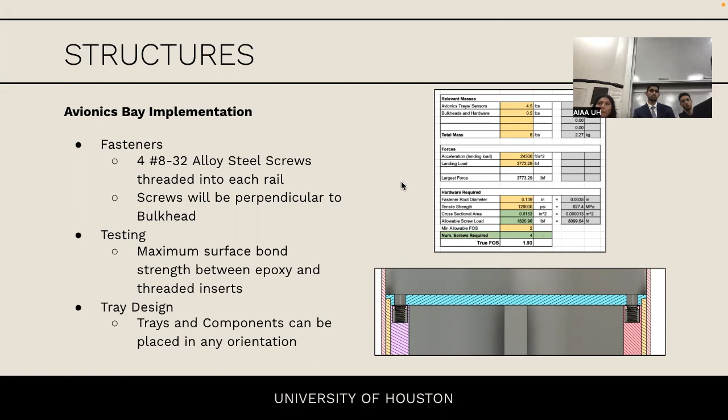How are you going to calculate how flush the prints are that you'll use to slot into those? Will they have issues with epoxy on the edges, like fillets on those parts, as well as strength over time of constantly putting things in and out? We've had issues in the past with epoxy failing from constantly moving things around. I worry if they're thin and there's a dribble of epoxy down the side, is it eventually going to break when pulling things out to reattach to the rail socket?

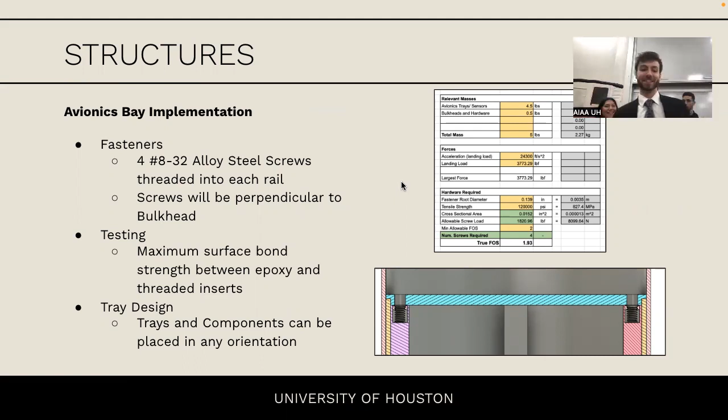Can I repeat the question? The question was related to the epoxying of the rails, these 4 rails in place on the internal diameter or internal radius of the coupler. Yes, that is something I did consider when going into the manufacturing of a coupler like this. I do expect there to be a slight radius of epoxy going from the edge of the rail onto the radius of the coupler.

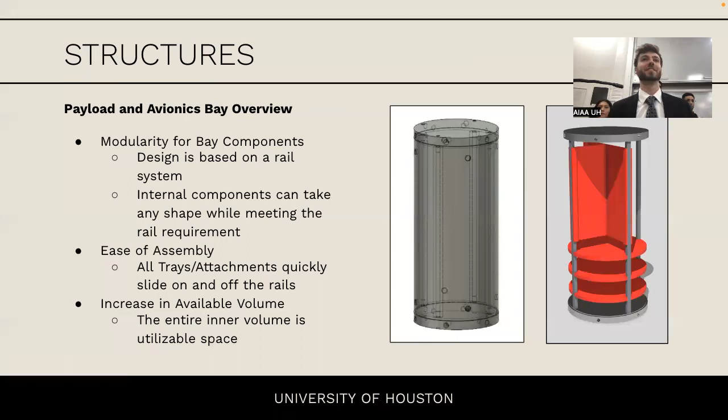To get around that, since we're 3D printing and have creative freedom in what these rails will look like, the section where the tray meets the rail could have a slight chamfer on that edge to account for any imperfections of epoxy. I don't know if that makes sense, I might have to draw it out for you. But yeah, that is something I had to think about.